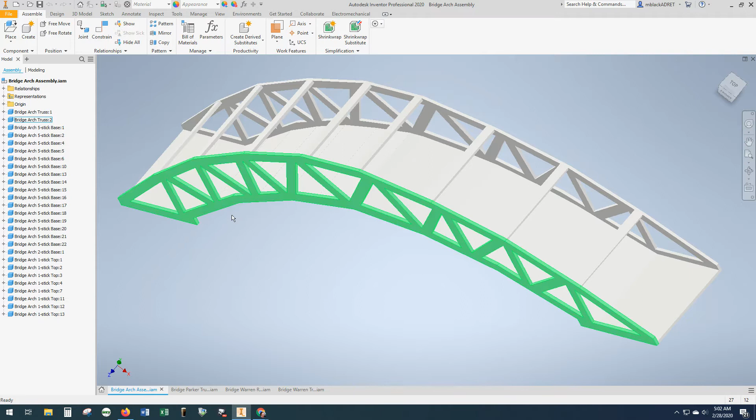Here's some examples. We have the arch truss type bridge that we put together. These individual pieces down here are a little different from what we made in the first videos, but you get the idea. We have a Parker truss bridge, same platform as before but different type of truss. Same with the Warren bridge. And this is a raised Warren bridge. And here's what a standard Warren bridge might look like.

This is kind of like what we're going to model right here as an assembly. So instead of a new part, we want to start with a new assembly. For now, we are going to get all of our parts placed on the page here, and then we'll start putting them together with constraints.

The first thing we want to do is hit place, and then you're going to have to navigate to the parts that you made. Hopefully you organize these in a nice, neat folder with names that you can recognize and not just part 1, part 2, part 3. In my case, I'm going to look for the Warren truss right there and hit open.

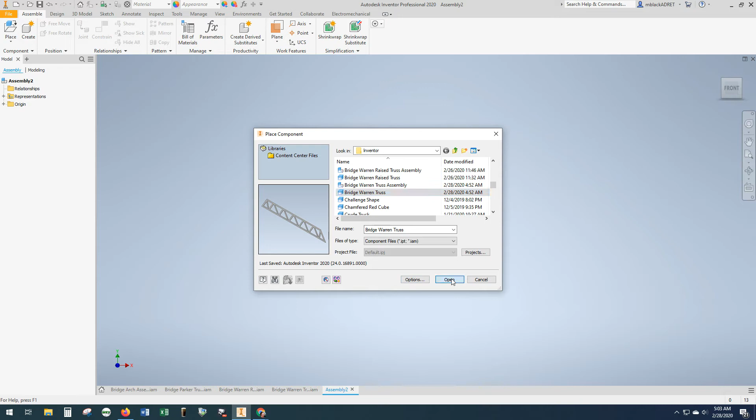It shows up real big. Don't worry too much about that right now. Just place it somewhere in the middle of the screen and you can see it pops in. I'm going to move another one over here because I'm going to need 2 of them. Now if I keep clicking, I'm going to just keep adding more and more trusses, so I don't want to do that. Now that I have 2 placed, I'm going to hit escape.

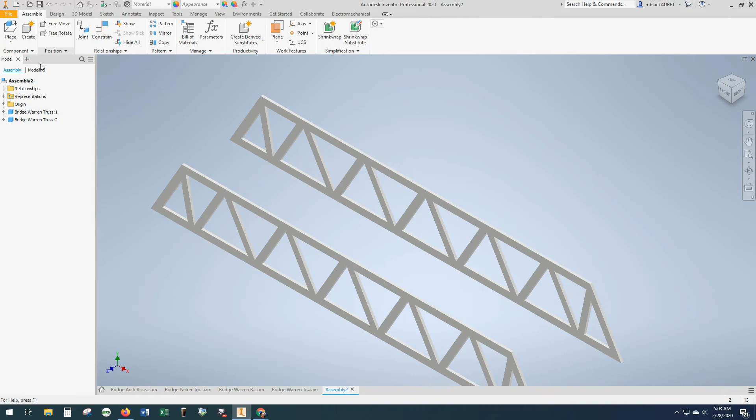Now I'm ready to place my other parts. So hit the place button again, and I'm going to go down to bridge. Let's see, it was bridge base. Open. And I'm going to pop this right about here, then hit escape. Don't worry about how that looks right now, we'll rearrange it in a minute.

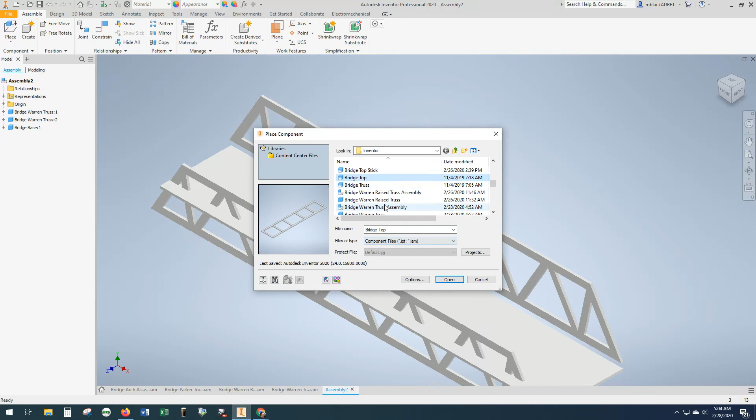And then place once more. Now I want to get the little individual sticks, which I believe I called a bridge top. Nope, not that - bridge top stick. There we go. Open. Okay, so right now this is placing it right in the correct orientation that I want, which is nice. So I'm going to put a few of them in here. We'll do 5, you can choose as many as you want.

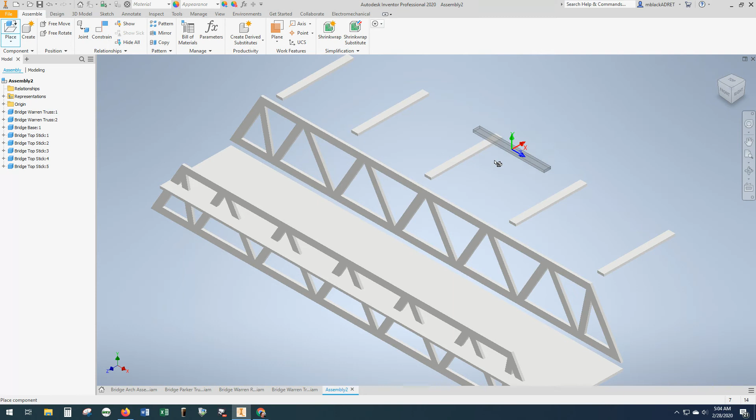You can always go back and place more. But if for some reason your stick is not oriented the way you want - in other words, if it was horizontal versus vertical - you can actually right click on this before you place it and rotate it 90 degrees on the y-axis, and you'll see that it then places it that direction. So if you run into that issue where it's placed in this direction and you want it more vertical, you can just keep rotating it on the 90-degree y-axis and it'll get it in the direction that you want.

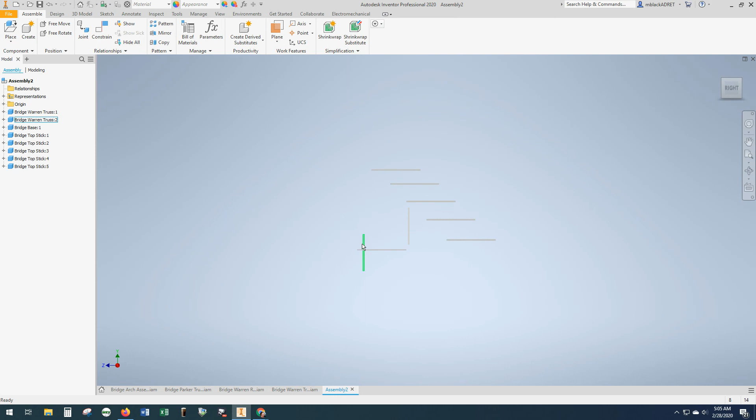Okay, so we're all set. I'm going to do a little bit of rearranging before we start doing the constraints. Right now you can move these parts, you can kind of arrange them how you want. I like to get them almost in place before I get started. So like this truss here, I'm going to want to move upward. To do that - and you don't have to do this - I like to go to the right side so I can see about where everything is, and I'm going to just move this up so that it's about where it needs to be. I'm not going to worry about these top members here right now, I'm just going to worry about getting the trusses about even with the surface. And then I'm going to go back to my home screen.

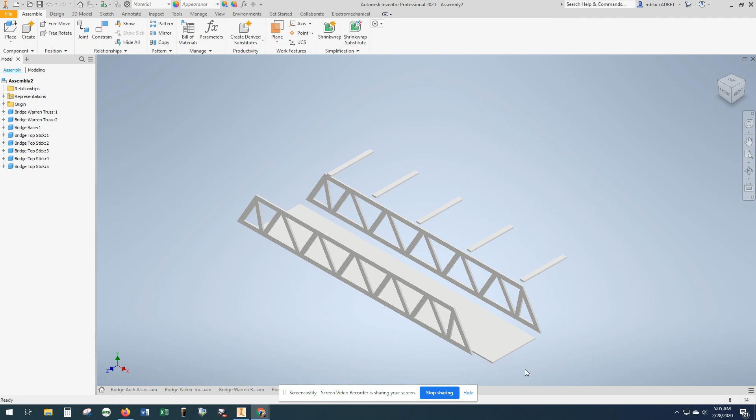Okay, so that's where we're going to stop in this video. Now we've got everything ready to make constraints. We are going to pause, and in the next video we will actually pop these together and constrain them.